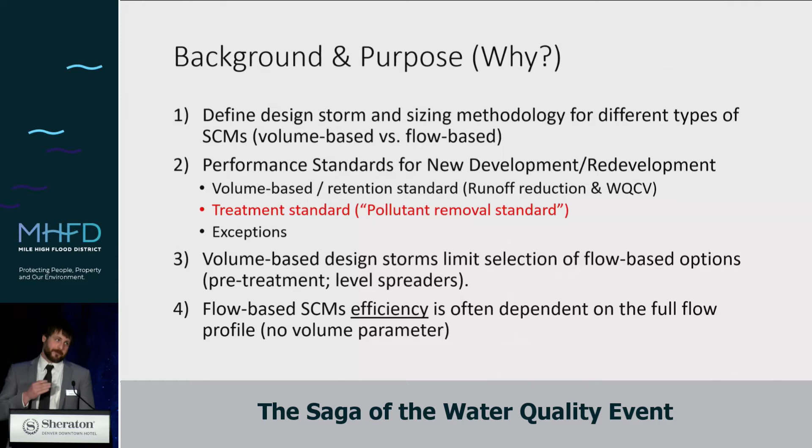But I think we've officially closed the door on some of the stuff that we've done. So real quickly, jumping back, just to change our mindset real quick, let's think about some of the terms that we're talking about. In our criteria manual, we're very specific about understanding these different variables and how they influence us, specifically sedimentation.

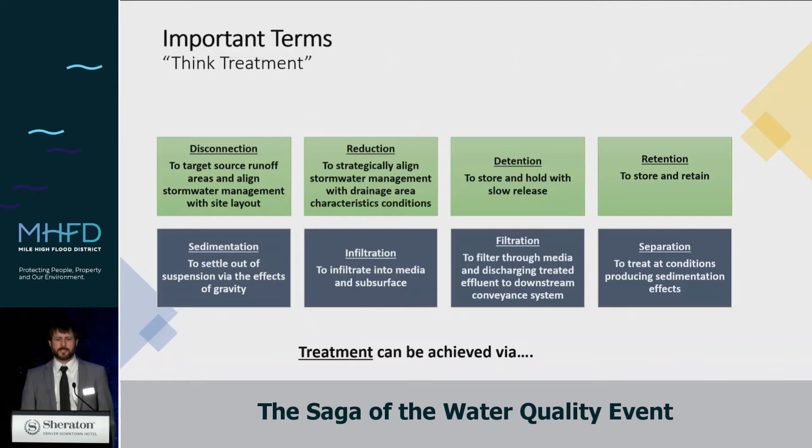We can go through infiltration. I don't need to jump through all of these, but really I think taking a step back again to not only the terminology, but also the acronyms that we're introducing. So you'll see here that there's stormwater control measures, which will align with the new criteria manual and updates, manufactured treatment devices, which is a new type of stormwater control measure, and then also these 3 things at the end.

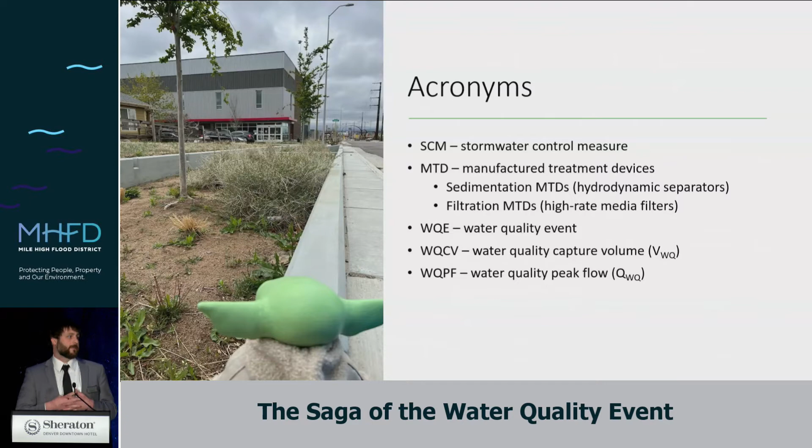And so the second one, the water quality event, we'll jump into that definition right next, but I think it's very clear to understand that all 3 of those at the end are intertwined and interlap, but there are very distinct differences. So what do we mean by the water quality event?

So we're not talking about the level of service event, and I think this newest version of the definition of what we mean by the water quality event is not just the design storm. So for our region, 80th percentile, 0.6 inches, we're all familiar with this value. But thinking about the water quality event at a given site, the water quality event is different at each site. The depth of 0.6 inches might be the same, but the site characteristics, the design storm characteristics, and other elements will contribute to that actual flow rate.

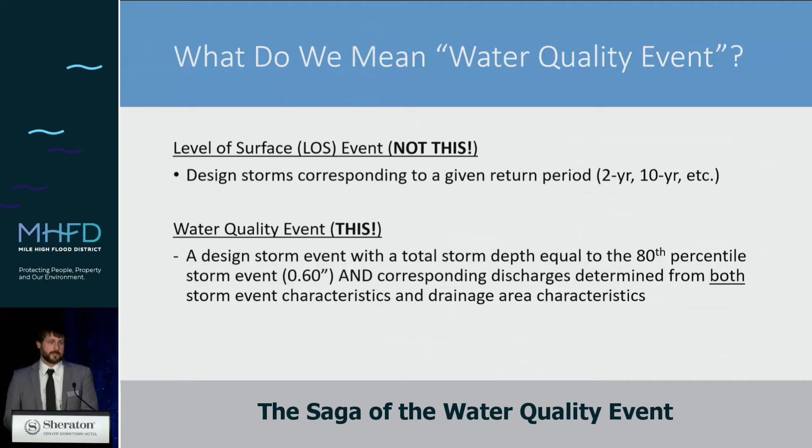So really the water quality event is the 0.6 inch rainfall depth separated, and then also the corresponding flow rate for that smaller storm event. And so this is kind of the analysis that we looked into.

Jumping back just real quick into some of the criteria stuff, the water quality capture volume and how this was originated by Dr. Guo and all those other researchers back 20, 30 years ago, but kind of how that's expanded into really what we're talking about here.

We're talking about this 80th percentile event. So on any given day, this type of analysis will show that this is really the range in which we want to capture. So what happens when it's less than that? Well, that's kind of the question, I guess we can say.

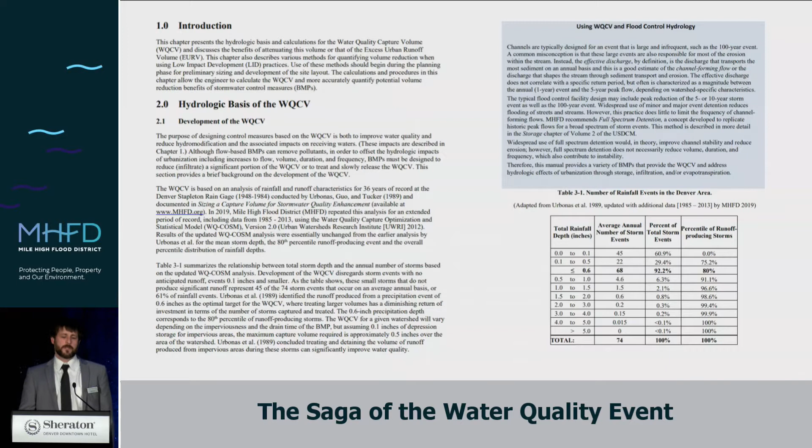So I think that quote, the definition of what is a natural flow regime - we're not just trying to carry it through river ecosystems, but now we're also trying to incorporate it into these kind of buffers, the stormwater control measures before water gets discharged into those systems.

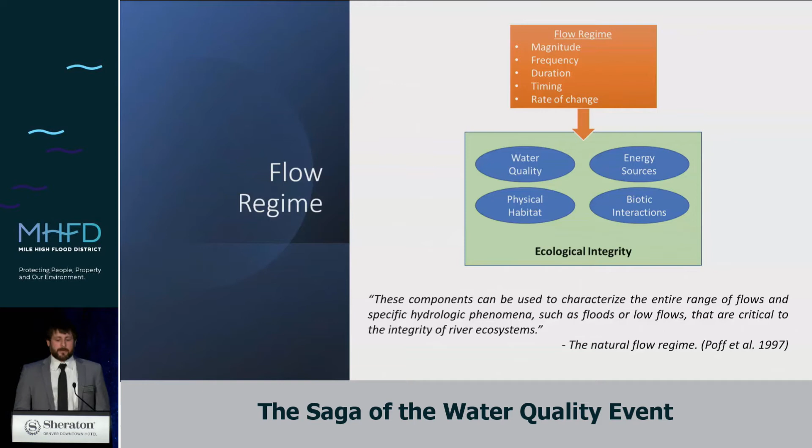So with that being said, changing the mindset, let's jump into some of the analysis. I think the challenge here was the amount of data we analyzed - at least 1,000 years of rainfall data, thinking of all the different gauges and where that went, as well as the CUHP rational runoff.

This is the summary of the water quality analysis. I can go through some of these pretty quickly - we took a bunch of different gauges and performed very similar analysis looking at rainfall only: is it possible to determine a design storm intensity, something reasonable that would correlate with this?

One of the things we're seeing with some of these rainfall curves is that the water quality capture volume, whenever it was originally developed, used one data set with a given set of parameters, where we assumed a separation time and a minimum storm event. Taking a step back, we went to the original data set, added a lot of other data to reanalyze this and understand what the sensitivity is.

So looking at rainfall only, we asked: can we get a peak 1 hour intensity based on storm depth? This is a bunch of different rainfall gauges - these are all alert gauges - showing the peak 1 hour intensity on the y-axis, and on the x-axis the total storm depth. Not seeing too much of a correlation.

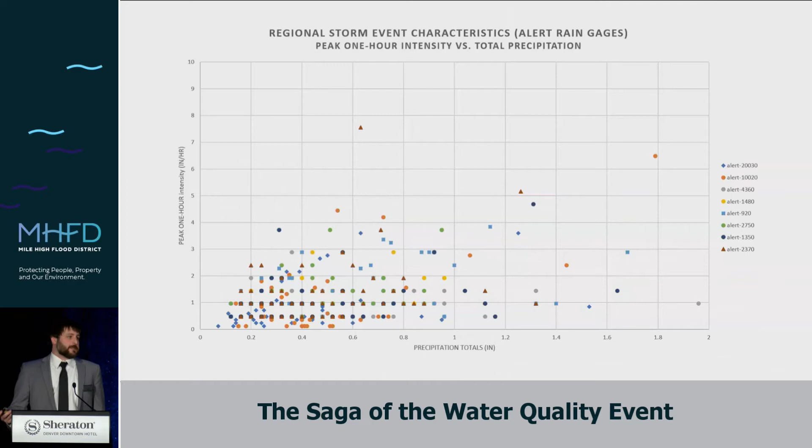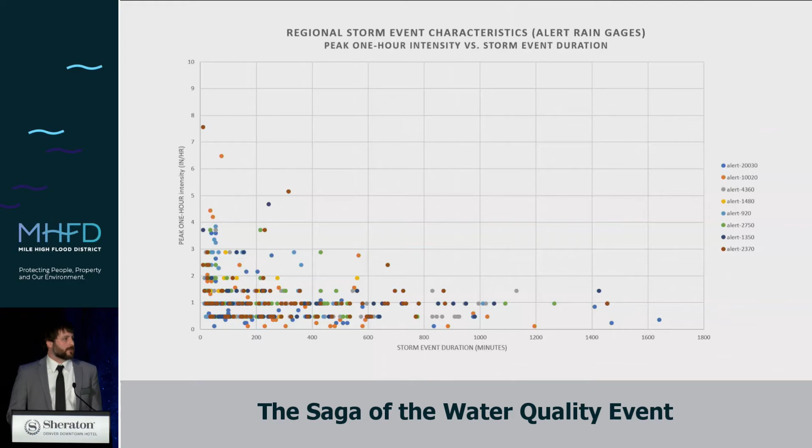But one of the things this rainfall analysis showed - which was an iterative process between rainfall only and the rainfall runoff, which I'll touch on in a second - is whether our storm events, these smaller storm events, follow the same type of distribution. So that was one of the checks.

The work that Dr. Guo and myself carried out was taking all of these storm events and normalizing them - putting the precipitation over the total precipitation and the time over the total time. This gives us an axis of 1 to 1, and you can see the dark black lines on this axis - those are the shape of the curve of our regional design curve that's already presented in the manual.

Looking at all of these smaller storm events, we were able to see that for the most part, most of our storm events do follow these trends. So at least we know the distribution is somewhat reasonable. We performed this at a bunch of different gauges. The big thing to show - let me go back one - is those areas on the left side that fall outside.

Those are the really short storm events where you might get 0.6 inches, maybe 0.45 of that 0.6 inches fell within the first 10 minutes. So those are the areas where it's coming out.

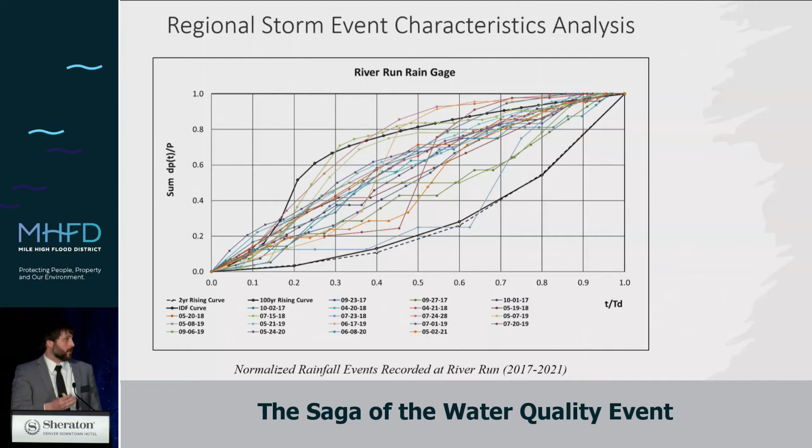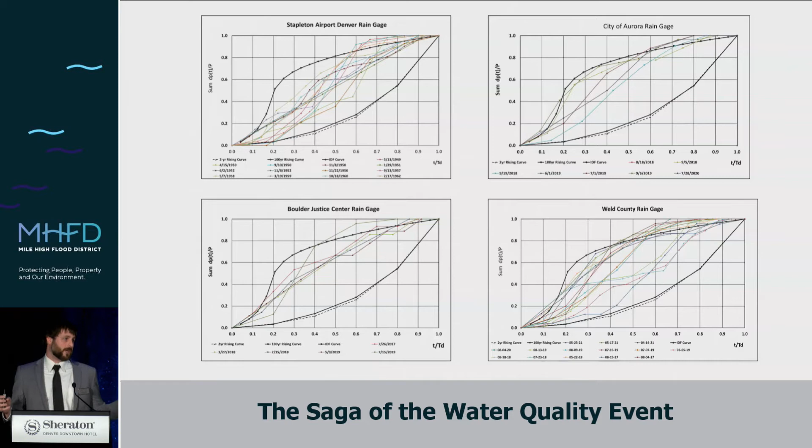But for the most part, what we did see is that regardless of location or geospatial data set, all the different data we've analyzed, some rain gauges reported hourly, some others reported sub-hourly, so it's really good to see that regardless of the data set or these different parameter reporting intervals.

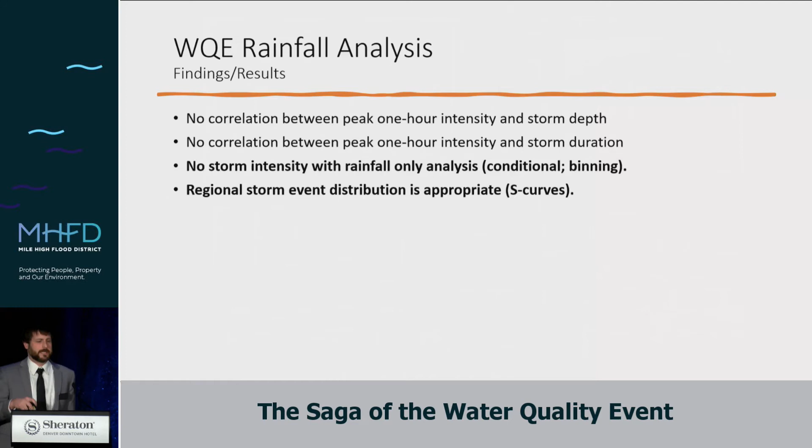We were still seeing similar trends. So real quickly, here's the summary. Some of the things I think that we saw was that there's no real storm intensity unless you kind of start doing this real selective storm event binning, and I think that's almost cheating statistics sometimes. But really the storm event database will be used again in the future.

So that was part A. Now part B is we're looking at runoff too. With the rainfall runoff analysis, I think this is probably the most important part of the analysis.

There's a couple different methods that the criteria poses. These are really CUHP, SWMM. There's also the rational method too. And so really what I wanted to do here, and this kind of stemmed from other research in the past, the runoff reduction method, but was looking at these different storm events and how they really compare.

Because if we put something into a CUHP model and we put something into a rational method model, the flows that we're talking about are definitely really important, especially if treatment is based on those flow rates. So how do we convert this water quality event, this 0.6-inch depth, which has been held true through the analysis with the two different methods?

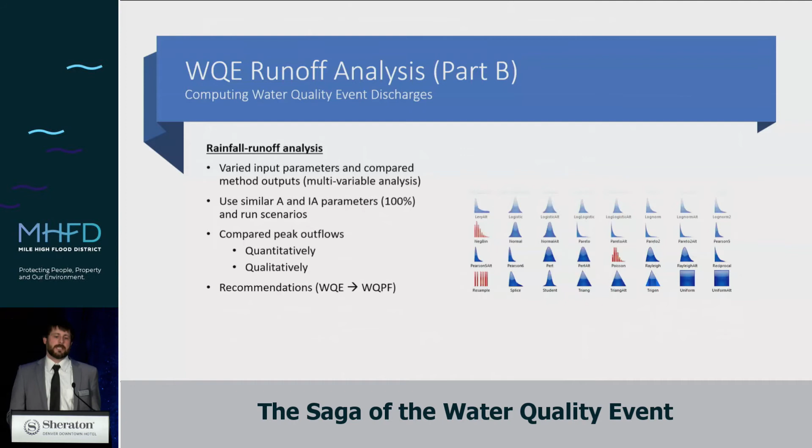So for those that know me, I like doing data and I like really the sensitivity. I'll find the ends and bounds of certain things. So for those that have ever run CUHP, the R values, really starting with those R values of how do we model that sensitivity. And so these are the different scenarios.

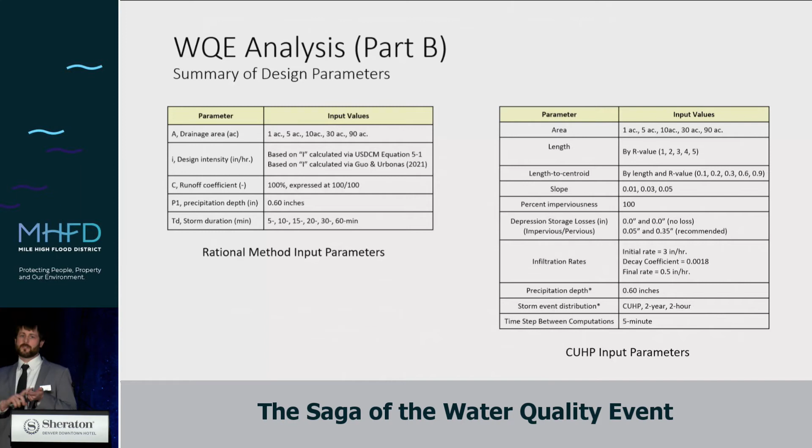So on the right side, we can see the CUHP input parameters. So for one model, there's 75 CUHP runs. Comparing the one model that we have, there's like 1 acre imperviousness. You can modify the length to centroid, kind of varying those parameters. And ultimately, what do we find?

So the first thing that we found was, this is taking a step back, this is going into the IDF curves, but it was kind of part of the rainfall analysis specifically. The water quality event, where does that fit using the intensity, duration, frequency equation that we have? It's kind of corresponding to, depending on your location, just under the 1 year or probably right about the 1 year. So that value right there we can already see is kind of regionally appropriate. It's something that's kind of under the 1 year.

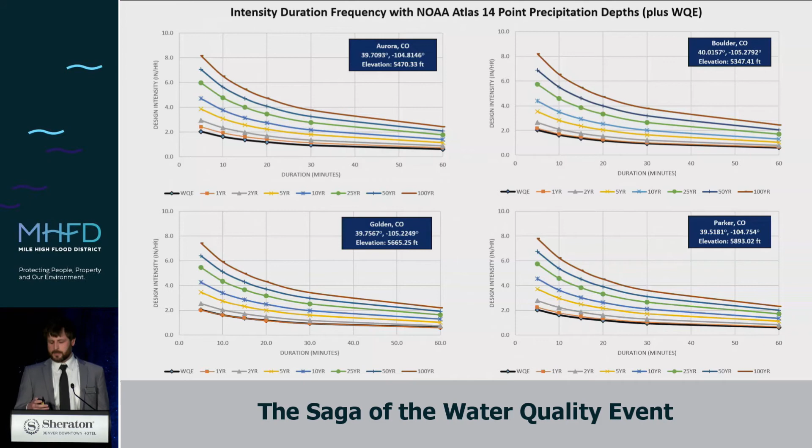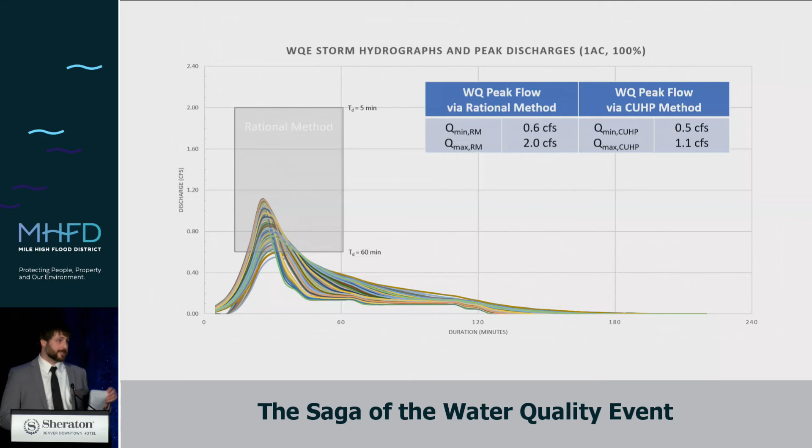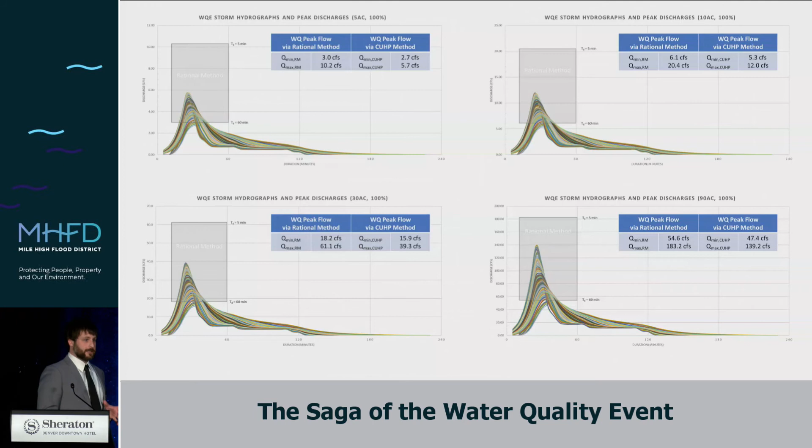So I think that kind of looking at that, as well as not just the 1 acre, but also varying these parameters with acres as well as imperviousness and kind of really trying to look at this range, what we can see collectively is that the rational method, once we start, for these smaller storm events specifically, is very much overestimating some of the things that we're finding.

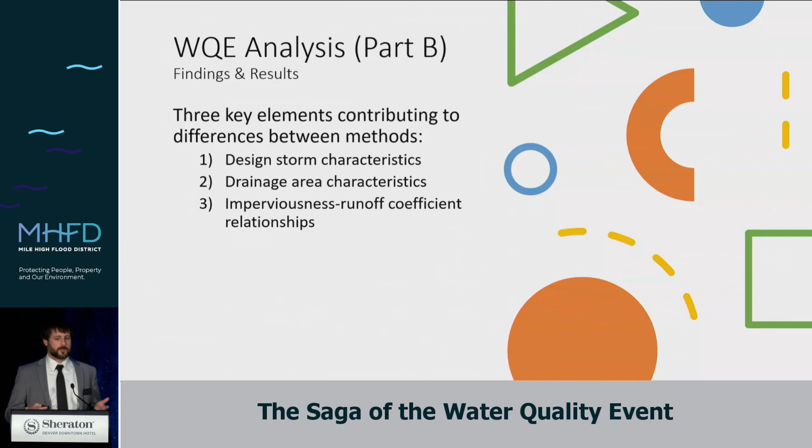I think that really the key differences that we see here are 1, design storm characteristics, 2, drainage area characteristics, and then 3, that imperviousness runoff relationship, because all of those are really directly correlated with the actual peak flow that we're getting, especially from the rational method.

So really design storm characteristics, I think this is one of the first settings I guess we can talk about, because really what we're doing in hydrology with all of these is we're tweaking different settings. And I think at one point we tweaked a setting and it's worked for the most part, but now we're kind of figuring out that it's still limited in some other factors.

Between that, the rational method, if we just look at design storms, we're assuming an average intensity versus something that's regionally distributed, and a storm event depth that's actually been regionally calibrated and quantified, as opposed to something intensity-based where we're just assuming a time of concentration equals the storm duration. So we can already see some differences between the two.

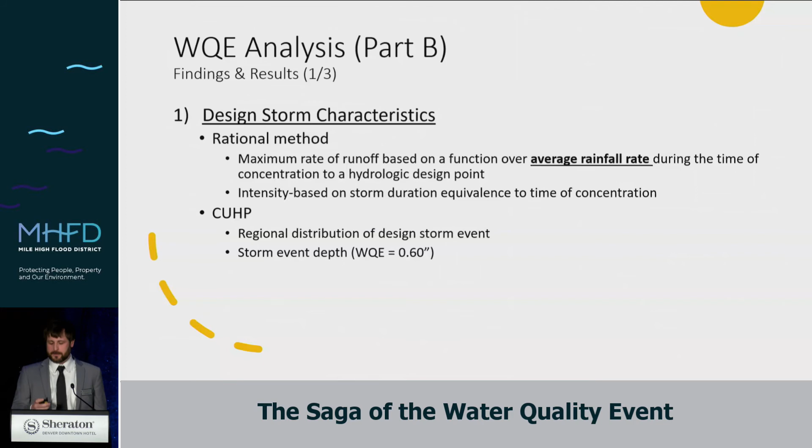Next is drainage area characteristics. This is something we'll see for the new criteria, understanding what the hydrologic design point is. If it's going into the upstream portion of the basin, we want that design point, not the point at the end of the basin. It's still important, but understanding where the flows are coming in definitely influences it.

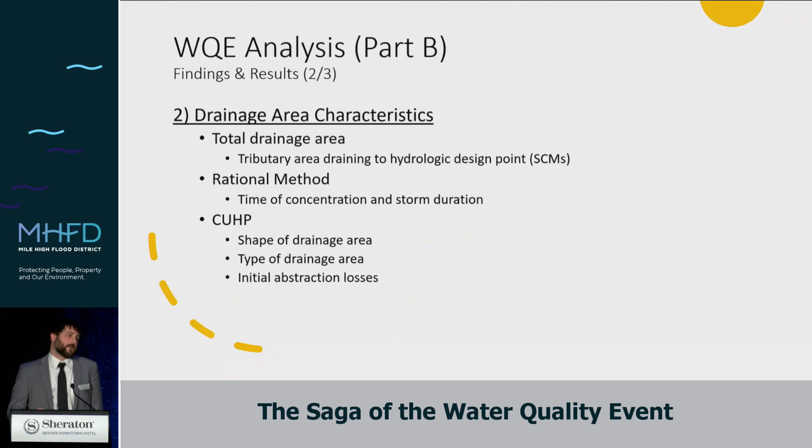Probably one of the biggest drawbacks to the rational method is it assumes nothing about the drainage area. It assumes uniform, homogeneous losses, compared to something like CUHP, which is shape-based, length-based. There's initial abstractions, and a lot of these other things that are time-based in nature, which is what we're really trying to find, as opposed to a single peak value.

The last point touches on imperviousness. For those that know me, I comment on imperviousness a lot. I think it shouldn't be left so much to engineering judgment whenever certain values are actually quantifiable, especially whenever it comes to the water quality event. Will pervious surfaces create runoff? Likely not, for these smaller storm events. So understanding what these directly connected impervious areas are is probably the most imperative thing for these types of flows we're talking about.

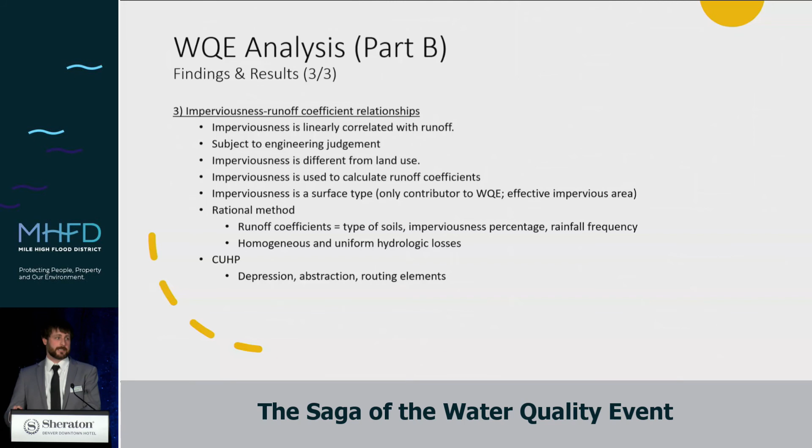I can touch a little more on this, but it's probably best to jump back into the text. Some of the findings from this analysis weren't entirely new, they might have been restated or refound in a different way, but really touching base on the limitations of the rational method and what we're really using it for, and why this matters again.

I'd like to jump back into this one. For MTDs specifically, one thing is their removal efficiency, just as one example, is based upon device characteristics, storm discharge, water temperature, and influent characteristics, like the sediments coming in. But volume-based design methodologies can't really be applied for those types of designs. This comes from a study done a little over 10 years ago, understanding that this efficiency, not only efficiency but the operation, they operate based on flows. We really only have a volume-based equation or a different type of level of service equation that we're going to be using for something like this.

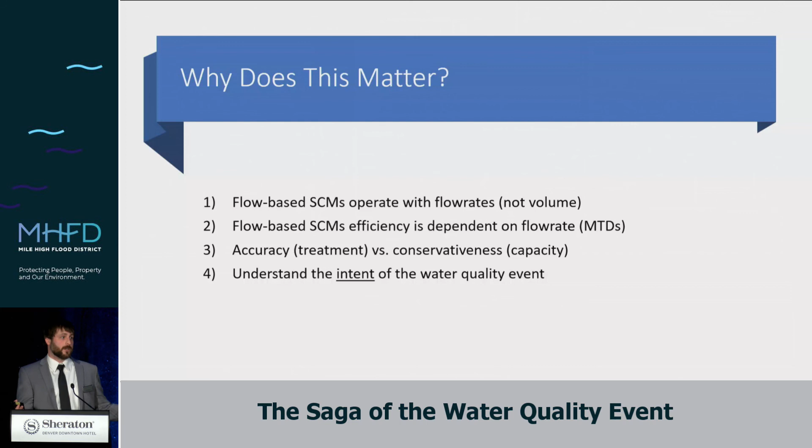Understanding that intent and really speaking towards accuracy, if we're trying to remove to the pollutant removal standard, we need things that are accurate versus something that's conservative, where if we're assuming this value we can store it, it's conservative because we know if it's more than that, we're still conservative. So I think those are really the big key hitters.

These recommendations are still in draft, but based on the analysis and feedback we did, what do we do with this in the end? Thank you to Andrew Earls and Dr. Guo for that feedback on how we implement this into our criteria. With the newest version of Chapter 4 later this year, maybe early next year, we'll see this new water quality event analysis incorporated into the front sections as well, Chapter 6 of Volume 1, with a peak flow and a method to quantify that peak flow.

If you put the water quality event depth into the rational method, you might be overestimating that removal rate. For an MTD that's going to operate at certain efficiencies, if we're looking at the lower efficiency, anything less than those 80th percentile storm events, or whatever we're designing for, it's never going to operate effectively. So we're going to be missing all of those smaller storm events because it's flow-based and we're just not going to be able to capture it.

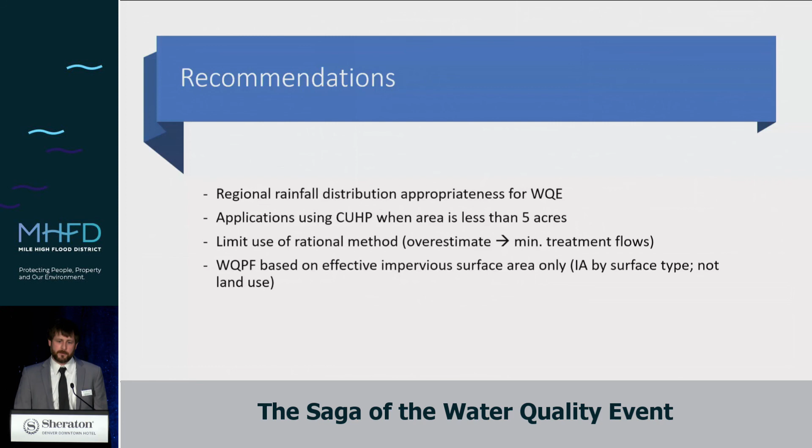Looking ahead, we're actively working on the technical memorandum, which will be published soon, so if you're interested in more about that analysis, and some updates to the USDCM Storm Drainage Criteria Manual, specifically you'll see some new MTDs and modified fact sheets. The water quality event will also be incorporated into Chapter 6.

And with that, that's everything I've got.